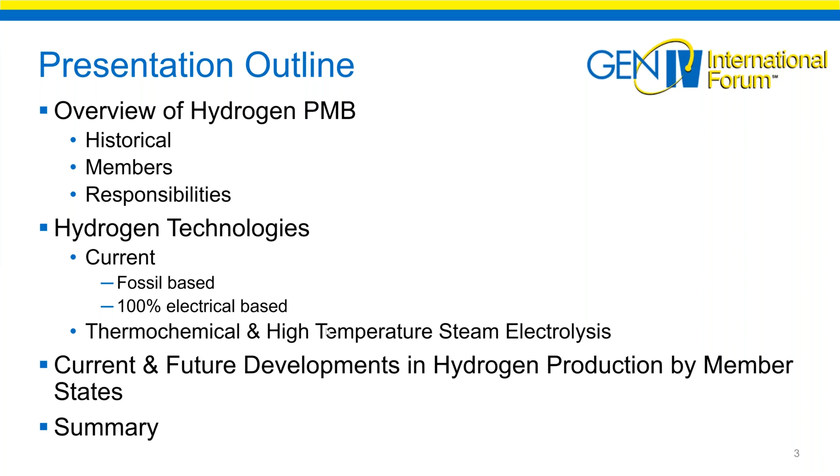My presentation will give a quick outline of the hydrogen PMB board itself, the current hydrogen production technologies and advanced technologies that our member countries are working on, and their current progress.

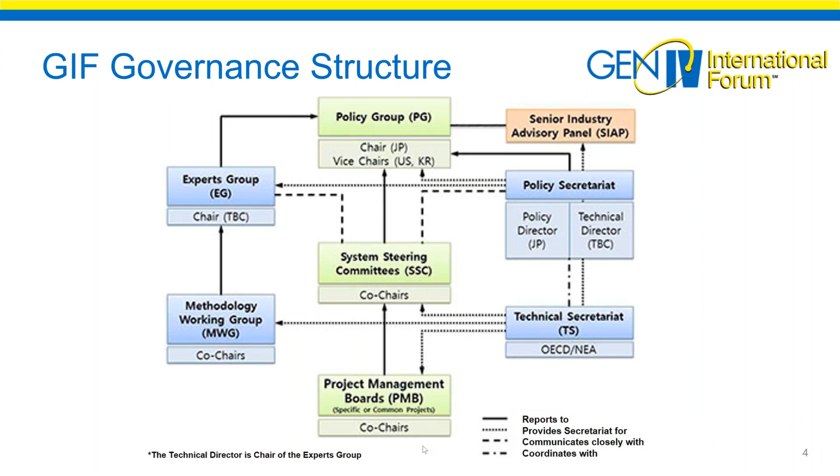Essentially, the PMB is established by the signatories of each project arrangement in order to plan and oversee project activities. Their main goal basically is to establish the viability and performance of the relevant Generation 4 system in their technical area.

At the beginning, we needed three or so face-to-face meetings a year to establish and implement the project plan. But with time, we have learned to be more efficient and have come down to a maximum of 2 meetings per year, sometimes only 1.

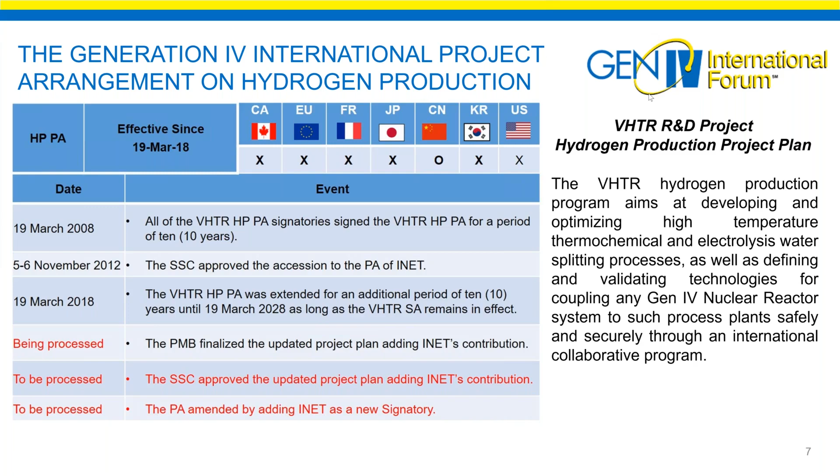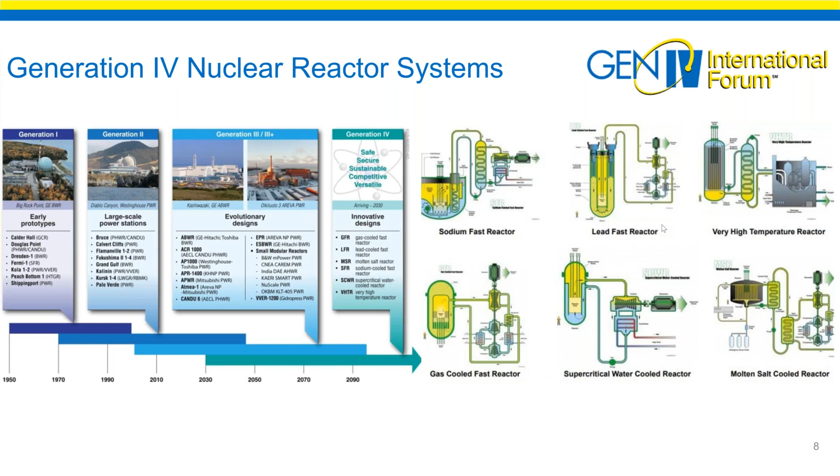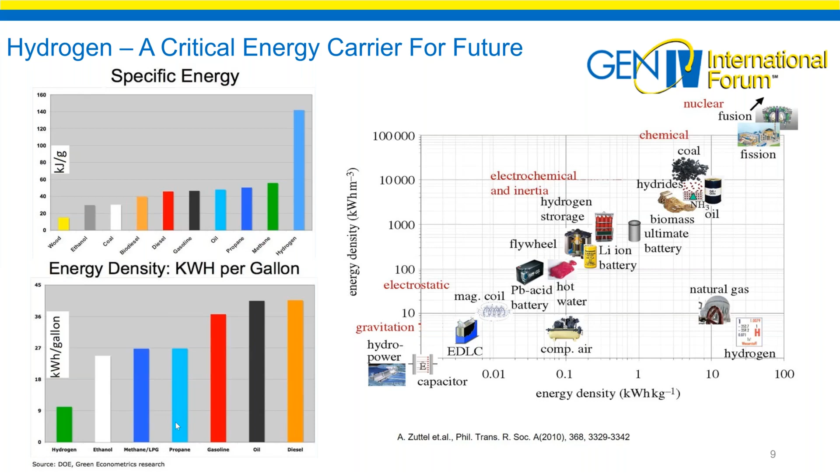However, because it is a light gas at ambient conditions, its energy density per unit volume can only be decent if it is contained at high pressure, as shown here. For example, here the hydrogen is at something like 100 megapascal pressure conditions. For automobiles, it needs to be compressed to something like 700 bar, that is about 70 megapascal, to cover a distance similar to a gasoline-fueled car with a full tank of fuel.

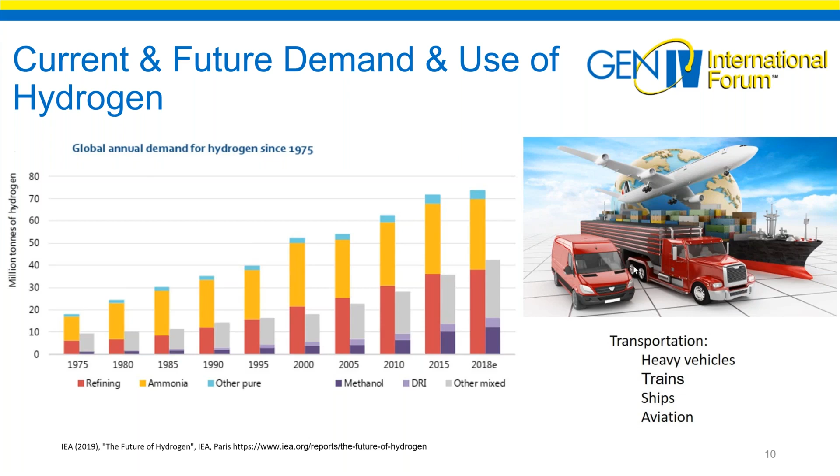Yes, there are cleaner methods available, like conventional electrolysis of water, alkaline or PEM type, using electricity. However, the electricity has to come from a clean source of production. The other issue is that electricity is not cheap, and the current electricity producing technologies are not as efficient as they should be or could be.

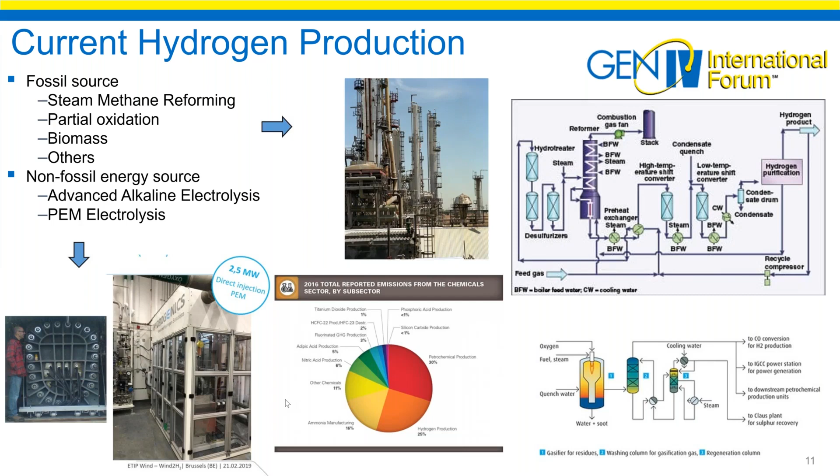Yes, there are hydrogen production processes that can utilize mostly heat to deliver hydrogen. However, as we'll see soon, these hydrogen production processes require high temperature heat. I would say this is one of the main reasons why many clever people in the past decided that producing hydrogen using advanced nuclear energy systems that can deliver heat at high temperatures is a good idea for large-scale hydrogen production.

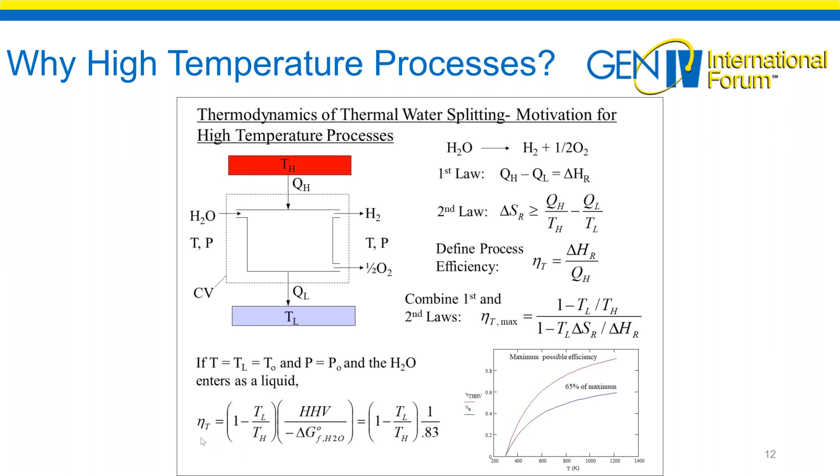So as part of an earlier energy research initiative called NERI, N-E-R-I, a study sponsored by the US DOE, a General Atomics team supported by Sandia National Lab, SNL, and the University of Kentucky looked at something like 115 different thermochemical cycles that produce hydrogen.

The SI, the sulfur-iodine process, sometimes called the iodine-sulfur process, is a closed cycle based on three main steps. One exothermic step, the middle one, the Bunsen reaction, producing sulfuric acid and HI at around 120 degrees C. Another endothermic step, decomposing the hydrogen iodide produced from the Bunsen reaction into hydrogen, the product that we want, and iodine to recycle for the Bunsen reaction.

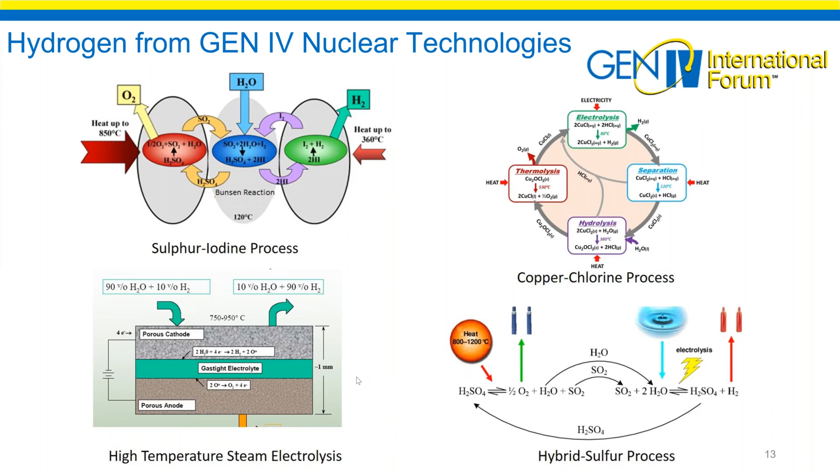This slide captures the kind of work being done on the sulfur-iodine process under its own work package. As part of the hydrogen PMB, each member state does its work in the various cycles and provides input to the work package created as part of the hydrogen PMB.

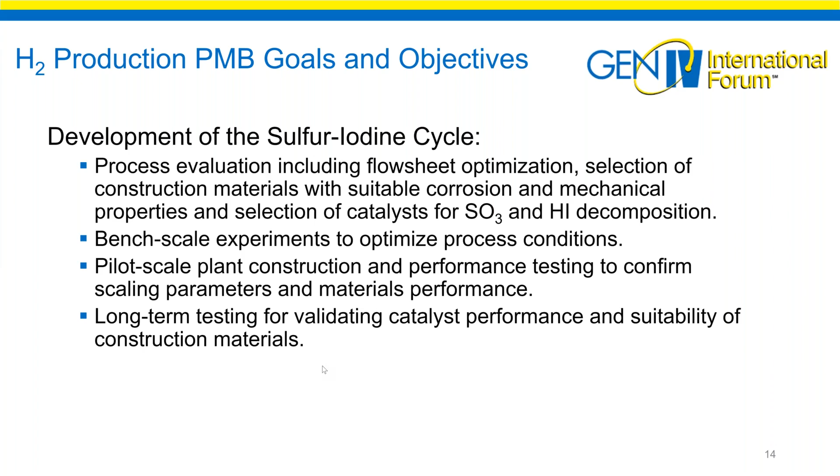So the sulfur-iodine process has its own work package where the process engineering aspects, materials and their mechanical strength and corrosion resistance properties, the catalysts used for the decomposition of hydrogen iodide and sulfuric acid, their purification, bench scale testing, pilot scale testing, and lifetime studies are all reported. These are all critical aspects of the process development, and they are covered in here.

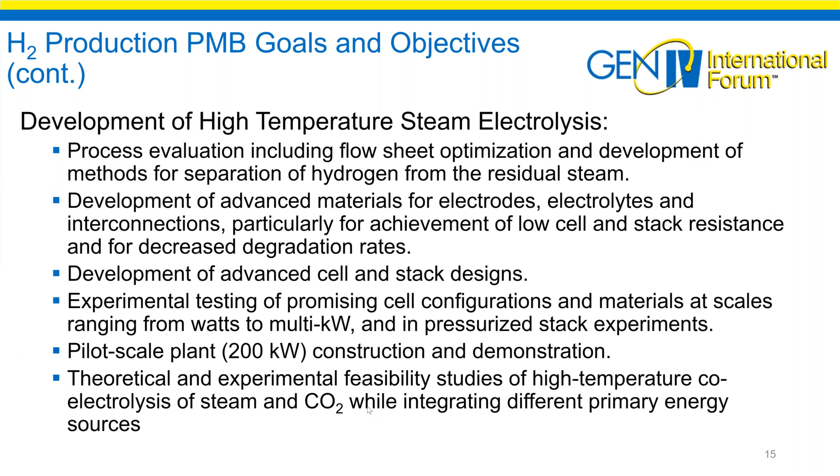Basically, you feed CO2 with steam into the electrolyzer to produce syngas, synthetic fuel. So what you get is carbon monoxide and hydrogen, which can be used to produce various chemicals. And this is a growing area that many countries are interested in.

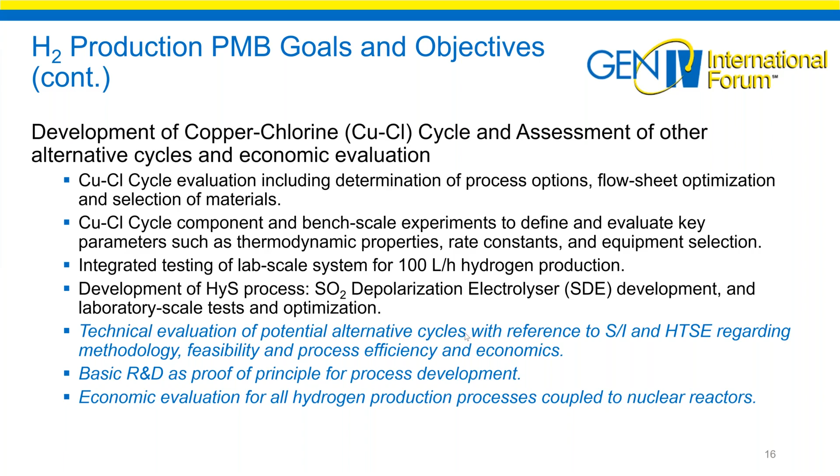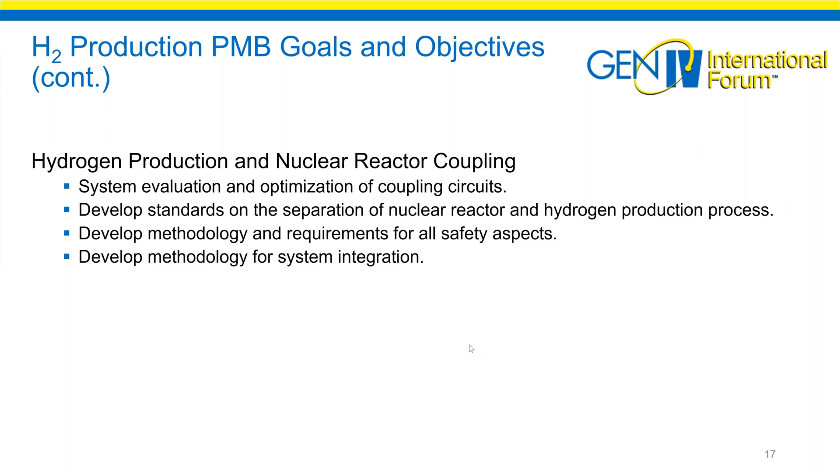This work package covers hydrogen production and nuclear reactor coupling, and looks at various aspects. It covers development methodologies and safety standards for individual processes and their coupling to nuclear reactor systems. Economic evaluations are also included in this work package.

So the HIx solution that comes in here needs to be purified. Then it needs to be concentrated using a technology called EED, the electro-electrodialysis method. And then it goes through a distillation system, a decomposition reactor, separators, etc., before the hydrogen is separated and provided, and the other materials are recycled, sent back to the Bunsen reaction.

Similarly, the sulfuric acid section has purification operations, concentration, and decomposition, where the sulfuric acid gets decomposed to SO3, and then SO3 gets decomposed to SO2 and oxygen as a product.

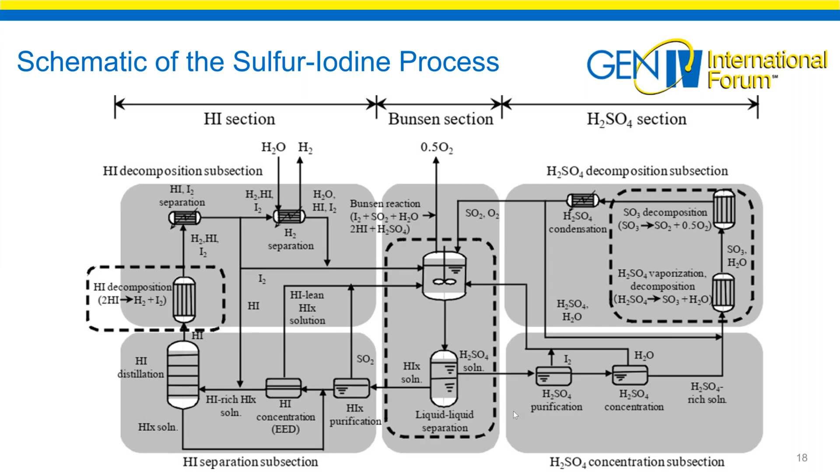And that successful demonstration encouraged them to move on to the next phase, which was a bench scale system, which was operated continuously for about a week. That's about 175 hours to produce hydrogen at about 30 liters per hour rate.

And then this demonstration was followed by R&D activities over the next several years that focused on the various issues that they discovered in the operation of these facilities, mainly materials related. The above focus contributed to the next phase of their development, this system here, which is 100 liters per hour capacity, built with more engineered components.

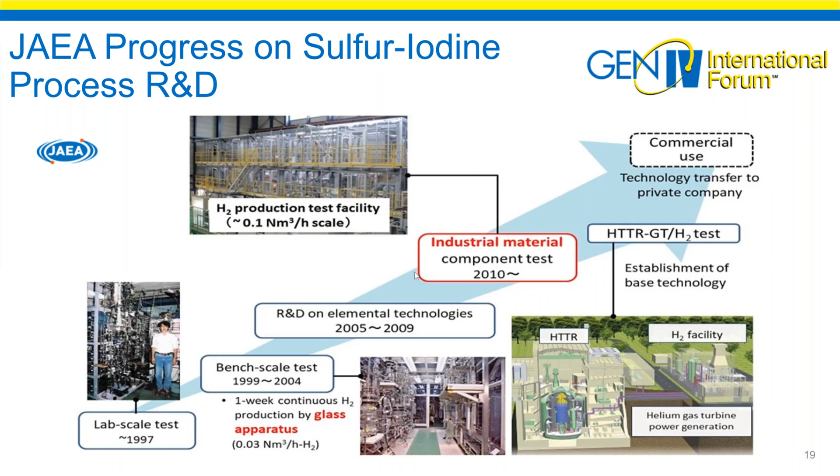So this slide summarizes Japan's efforts since 2010. Focused on integrated tests of these various components, exposed to both liquids and gases. There are both liquids and gases in the system. Exposures to components over 150 hours at a hydrogen production rate of 30 liters per hour here.

And actually that work really showed that some of the materials that they had selected and used had a decent behavior under these conditions. Their current focus is to acquire more materials related data on long-term testing and the exposure of materials to these process fluids and gases.

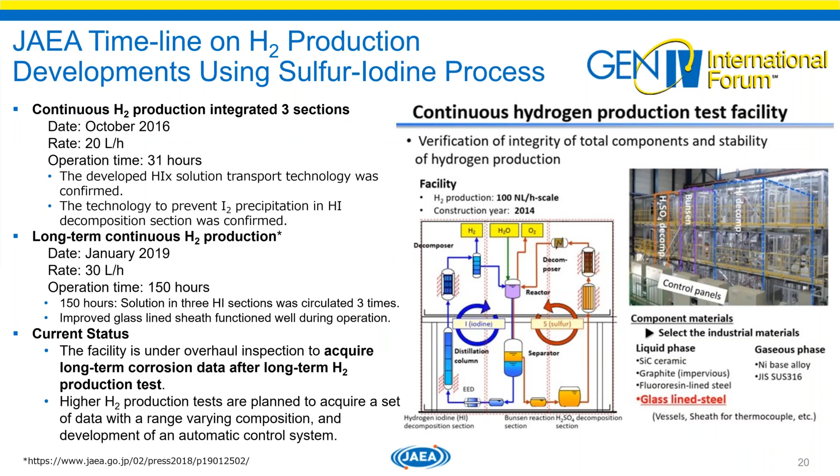So this slide shows the demand for hydrogen that the Japanese expect over the next several decades, and how Japan is going to satisfy such a demand, at least partially, using the high temperature gas cooled reactor technology that they're developing, integrating it with the hydrogen production process.

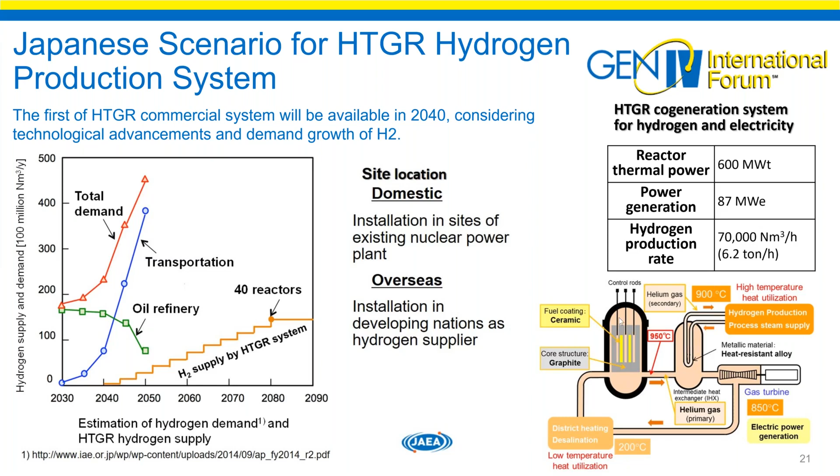This slide also shows the high temperature gas cooled reactor cogeneration capabilities, that is to produce heat as well as the electrical power to produce the kind of hydrogen production rate that they've shown here. This slide basically summarizes what I just mentioned.

So China has been very actively involved in the sulfur-iodine process. This slide shows their progress from fundamental studies in the early 2000s through system integration, key component studies, and then the ambition to couple the hydrogen production process to their HTR-10 nuclear high temperature reactor system. The HTR is a 10 megawatt thermal power unit.

In 2009, they carried out proof of concept development in what's called the IS-10 system, which was a 10 liter per hour hydrogen production capacity unit. And later on in the 2014 period, they moved on to what's called the IS-100 system that was capable of producing 100 liters per hour, shown here in this picture.

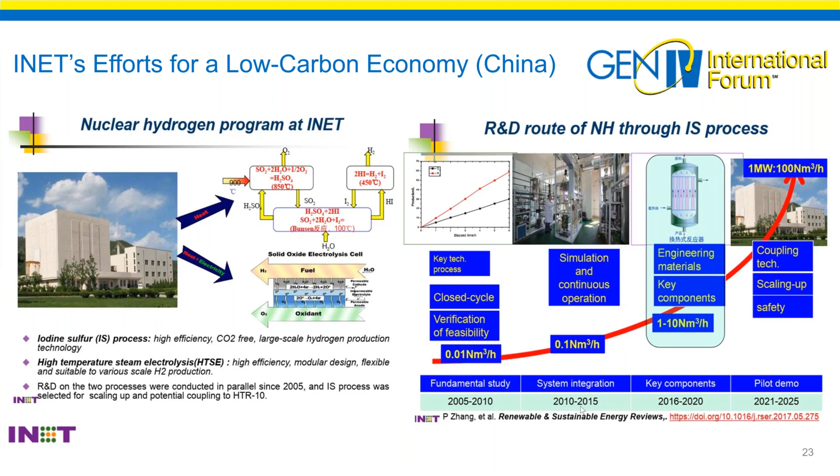It ran for something like 86 hours, producing hydrogen, out of those 86 hours, 60 hours continuously at something like 60 liters per hour. They are also looking at materials currently and larger scale demonstration in the future. This slide shows their current and future activities in the area.

One of the important contributions of Japan and China to the development of the sulfur-iodine process is the HI concentration technology, which is the EED, this electrodialysis system, where the HI is concentrated to overcome the azeotropic issues. Again, they are looking at all the different sections of the whole process, simulations and coupling of the hydrogen production process to the HTR system.

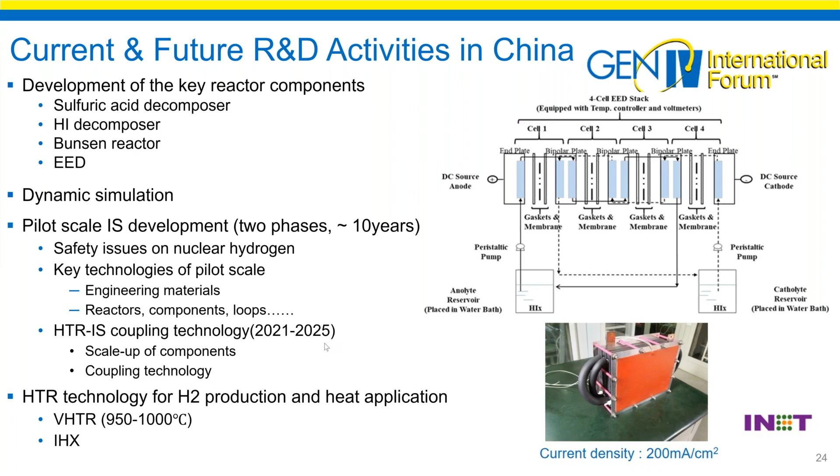So this slide is on the Korean activities. Korea earlier on focused very heavily on the sulfur-iodine process development. They were one of the main players. The current focus, however, is in investigating the integration of the hydrogen production processes to VHTR systems, as shown here. They are looking at high temperature steam electrolysis integration, sulfur-iodine process integration to the VHTR, and also steam methane reformers to the VHTR.

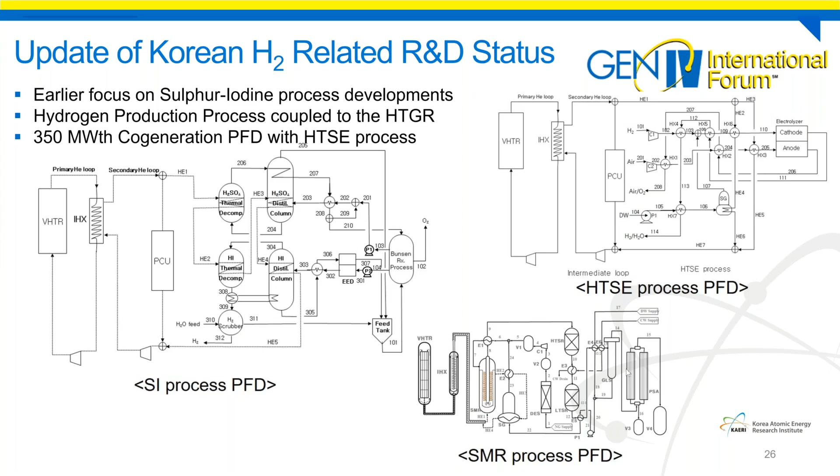Moving on to the high temperature steam electrolysis. As mentioned earlier, HTSE is the reverse of the solid oxide fuel cell technology. However, the performance and the efficiency of the cells are quite different under these different operating conditions. The efficiency under the electrolysis mode is less compared to the fuel cell mode. There are various reasons for the different behaviors under these conditions, as shown in this slide here.

Originally, high temperature steam electrolysis had separate layers for the cell: electrolyte, the cathode layer, which is a nickel cermet electrode, and the anode layer. These were all separate layers in the old technologies, where they were put together to produce a cell and then a stack. The latest technologies involve electrode supported cells, in which the anode and or the cathode electrode materials are coated onto the sides of the electrolyte. Here it's shown in white.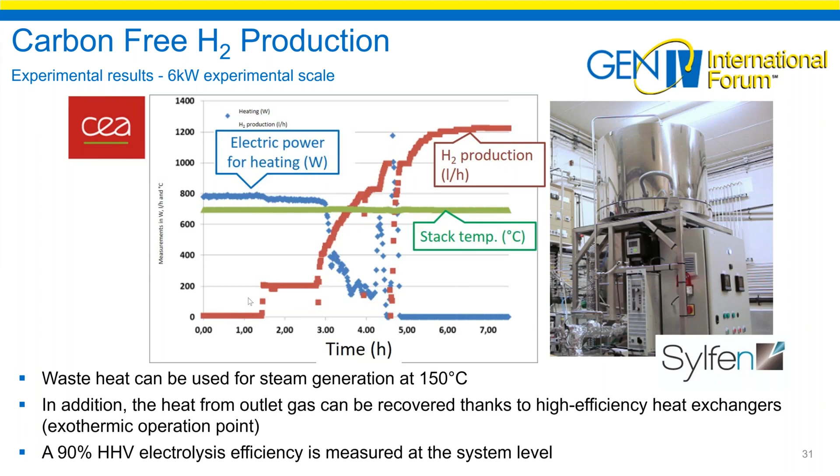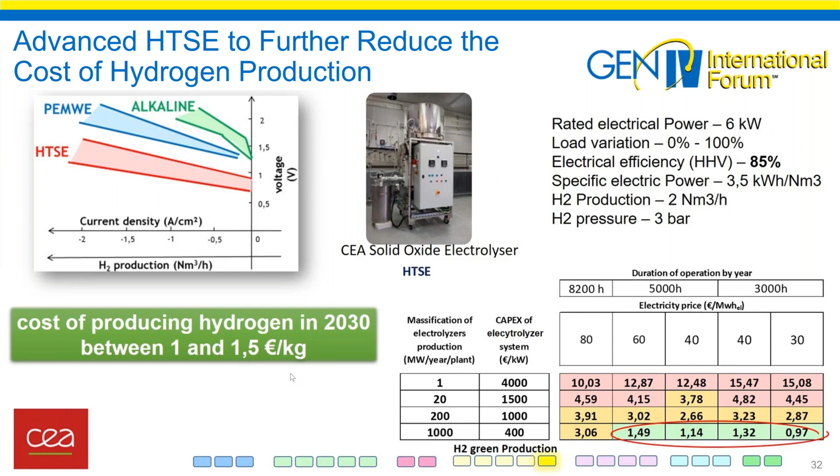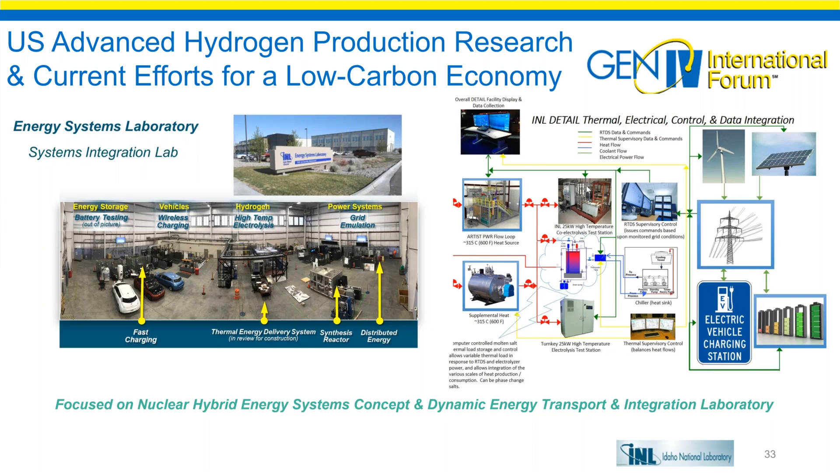What's called DETAIL lab, the acronym for Dynamic Energy Transport and Integration Laboratory, includes the 25 kilowatt electrolyzer as part of this system.

The effort is focused on advancing the state-of-the-art high-temperature electrolysis technology while demonstrating grid and thermal energy integration and dynamic performance characteristics. The facility, this electrolyzer system, has been commissioned, and initial testing at the 5 kilowatt scale has been carried out.

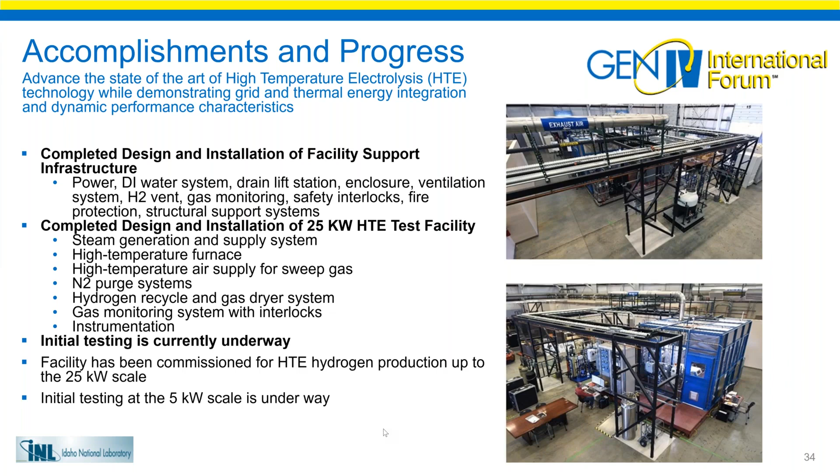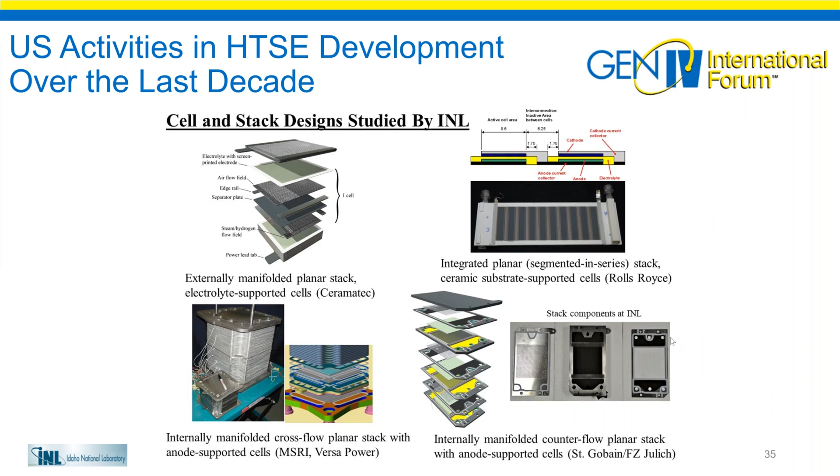Actually, the US over a period of time was very heavily involved in the development of the high temperature steam electrolyzer components, and this slide shows that they worked with several manufacturers and suppliers of various components for the electrolyzer, tested them, and worked with these suppliers. The suppliers and manufacturers identified in this slide are Ceramatec, MSRI, Versa Power, Saint-Gobain, Rolls-Royce, etc. So there was a lot of work that went into the development of the various components at INL, Idaho National Lab.

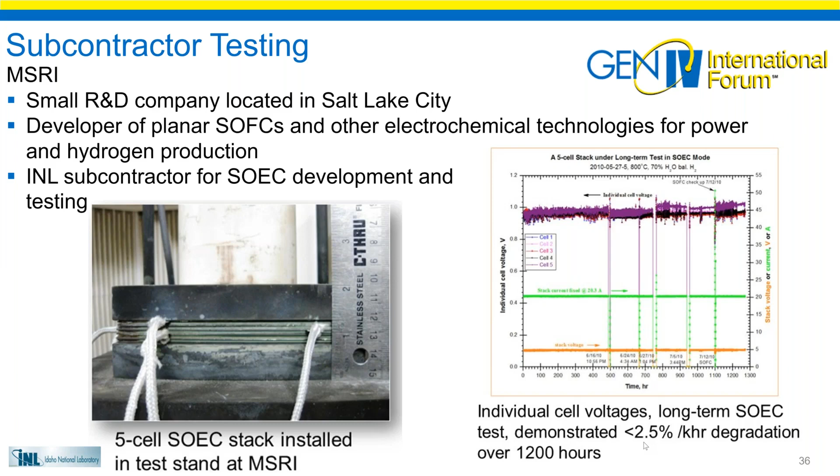Actually, recent advancements around the world have demonstrated even better lifetime performance of these cell designs. As I think I pointed out earlier, various countries in Europe are actively pursuing high temperature steam electrolysis development. However, many of these developments are really linked to solar power rather than nuclear power. That is fine as long as the basic HTSE technology is developed for application with different energy sources.

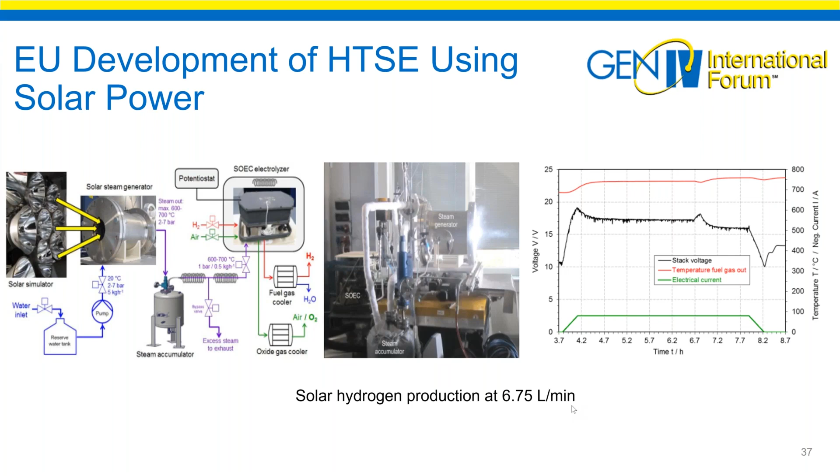So moving on to the Canadian focus on the copper-chlorine cycle. Canada has focused on the development of the moderate temperature process. We call it moderate temperature because the temperature requirements are less severe, about 530 degrees C. As I pointed out before, there are 3 main steps involved here: electrolysis, hydrolysis, and decomposition.

In the electrolysis step, copper chloride HCl aqueous solution gets electrolyzed to produce hydrogen and CuCl2. CuCl gets oxidized to CuCl2, and there's a separation step here where heat is provided, and then you basically produce CuCl2 for the next step, where it is hydrolyzed with steam at around 380 degrees C to produce an intermediate product called copper oxychloride, which is then passed to the decomposition step, where it's decomposed to produce oxygen and the CuCl required to complete the cycle. As I said, the maximum temperature is 530 degrees C for the decomposition step.

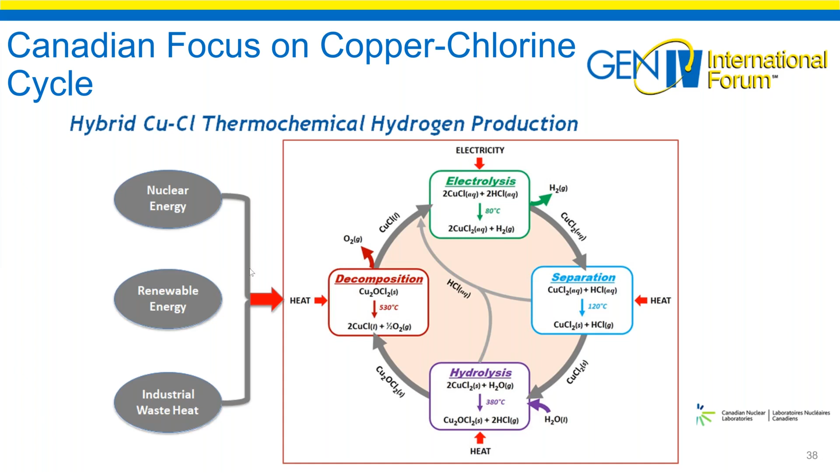Hence, you can use moderate temperature nuclear reactors, renewables, and even industrial waste heat. So the attractiveness of the CuCl cycle as compared to sulphur-iodine, etc., as you could have seen from what I've shown already, it's somewhat of a simpler process. The chemicals involved are not that bad, though the HCl at the concentrations we use has significant limitations with materials, etc. But it's somewhat an easier process, and it does have high efficiency for better economics at large scales.

As I said, low temperature, we can use different reactor systems ideally suited for coupling with heat sources. Small modular reactors is an area that this copper-chlorine cycle can be coupled easily with. As I said, materials of construction is not too bad.

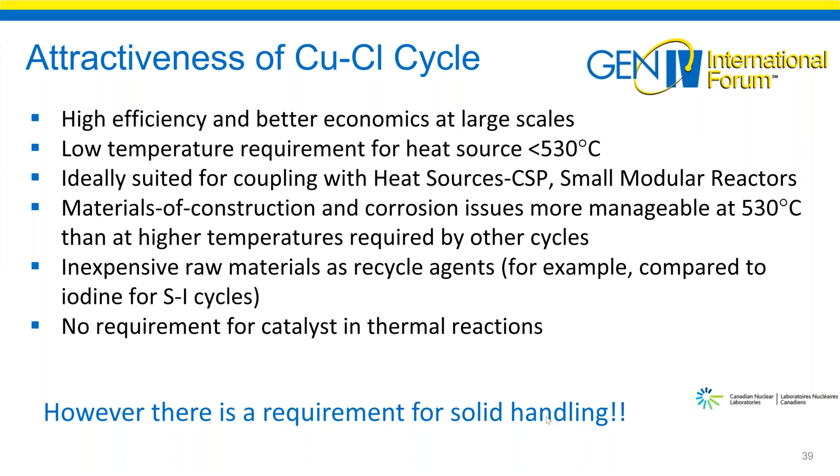The raw materials are inexpensive, and there's no requirement for catalyst in any of these steps, except the electrolyzer, which does have a catalyst on the electrode, but it's a well-established catalyst technology. However, there is a requirement for solid handling. That's the caveat here, which requires special considerations.

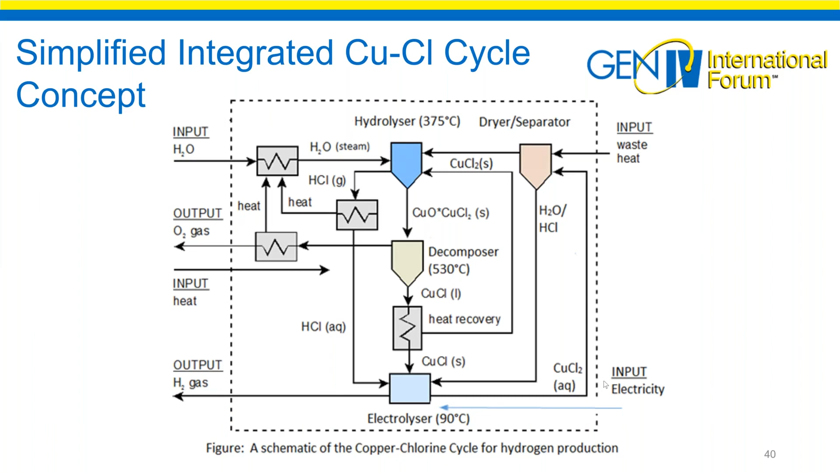This slide basically just shows a simplified integrated copper-chlorine cycle of the different steps that I talked about.

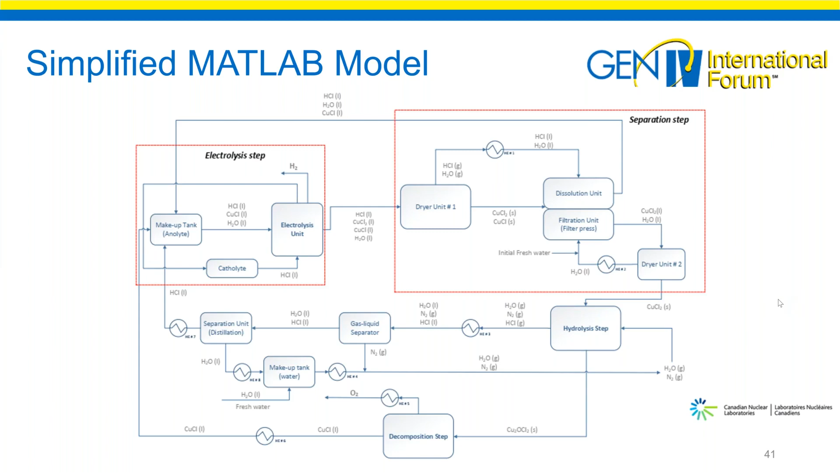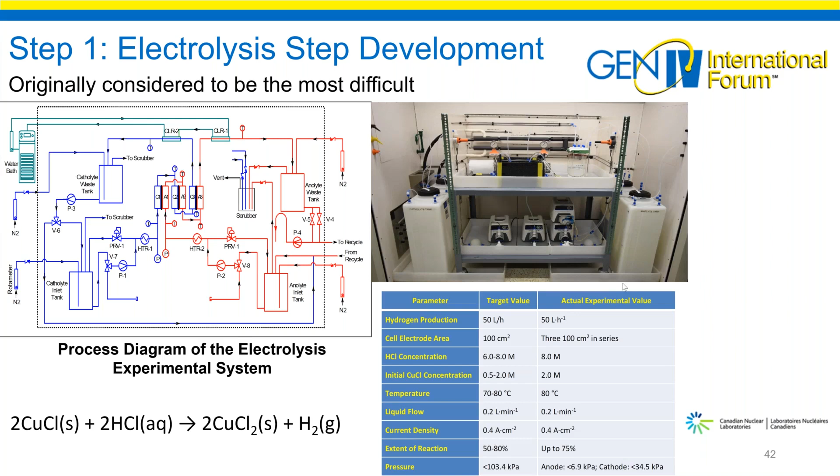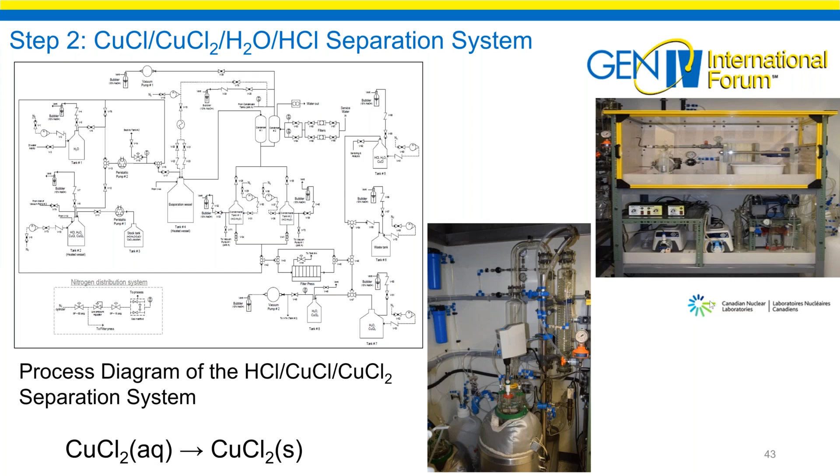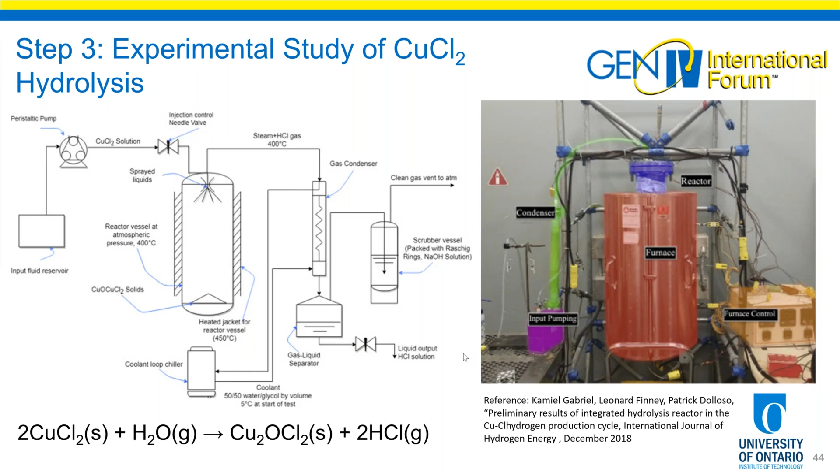This slide 44 is the hydrolysis step, basically hydrolyzing the CuCl2 with steam. It's been the most challenging step for continuous operation of the overall process. Progress is achieved, though a bit slow, and current efforts are basically to make it more efficient and more amenable for integrating within the complete system. There's also a collaborative development project underway with Ontario Tech University in Ontario, Canada.

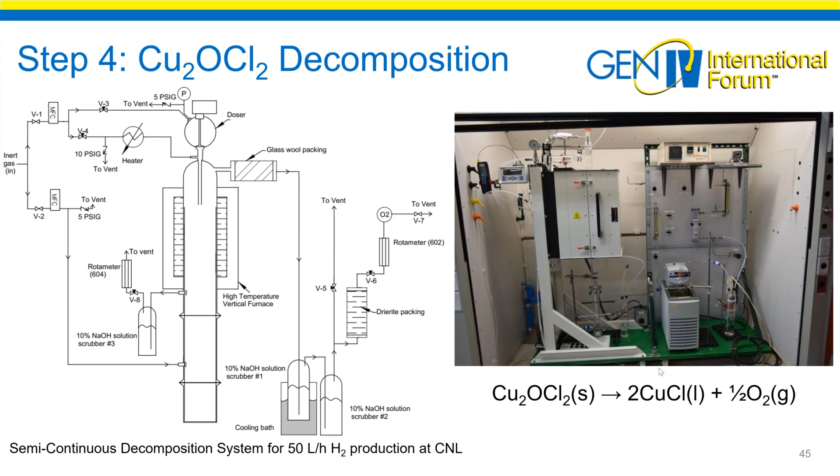So in Canada, CNL is spearheading a plan to demonstrate this technology for industrial application. The current plan is by 2021 to put together a lab scale system to produce something like 50 liters per hour of hydrogen using this process. Following that, the plans are for pilot plant demonstration with commercial partners, and then further implementation for industrial applications.

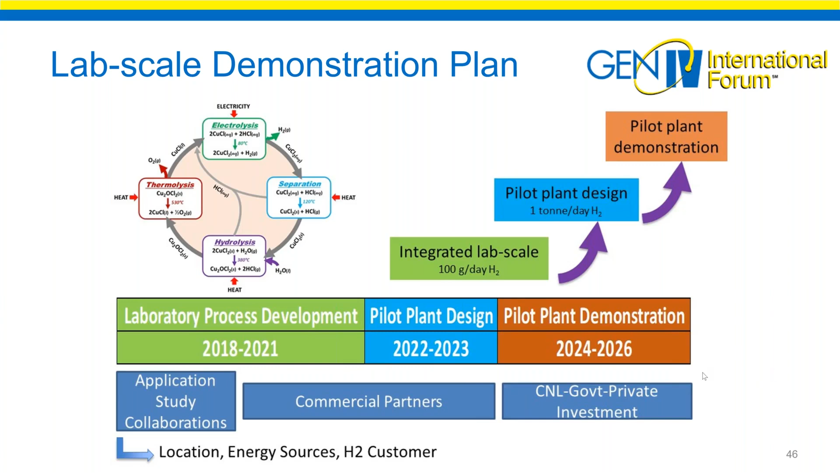I didn't talk much about the hybrid sulfur cycle. The development of this technology has been somewhat limited. In the early part of the first 10-year project arrangement of the hydrogen PMB, around 2008, there was considerable interest in this technology in the US, and there were some good advancements happening. Unfortunately, because of the down selecting that happened, this process also got skipped.

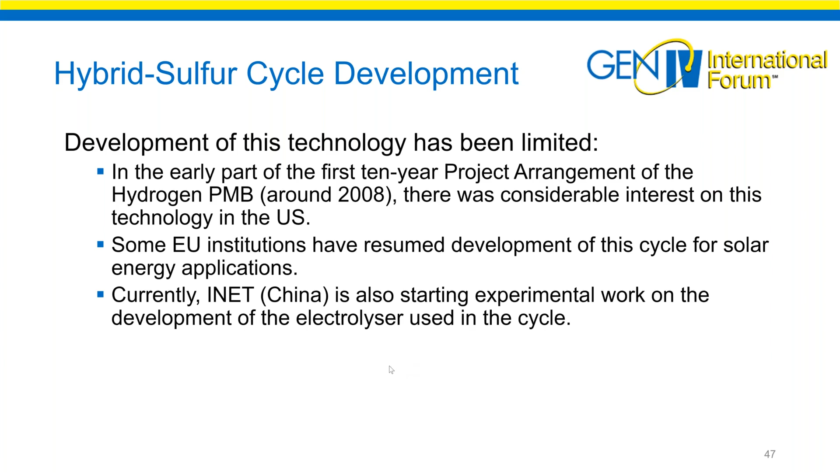But EU institutions have resumed development of this cycle for solar energy applications. Currently, INET in China is starting experimental work on the development of the electrolyzer used for this process.

So in summary, I would say there's been very good progress demonstrated by the member countries, and these are captured by the Hydrogen Production Management Board. The operation of the integrated sulphur-iodine process has been demonstrated, so it's not really theoretical. However, there are materials-related issues that require a solution for industrial demonstration.

High temperature steam electrolysis technology is actually a reasonably matured technology. However, degradation of cell components requires continuing advances, and the capital costs still need a reduction.

The copper-chlorine cycle development is, as I mentioned before, approaching lab scale demonstration and operation of the integrated system. Some of the current effort is in solid transfer and also energy optimization.

All the above hydrogen production processes still require demonstration of economical production capabilities. They've all been demonstrated reasonably well. But with advances through planned developments that are currently going on, there is very strong investment in these technologies. I believe economical hydrogen production can be achieved with these processes.